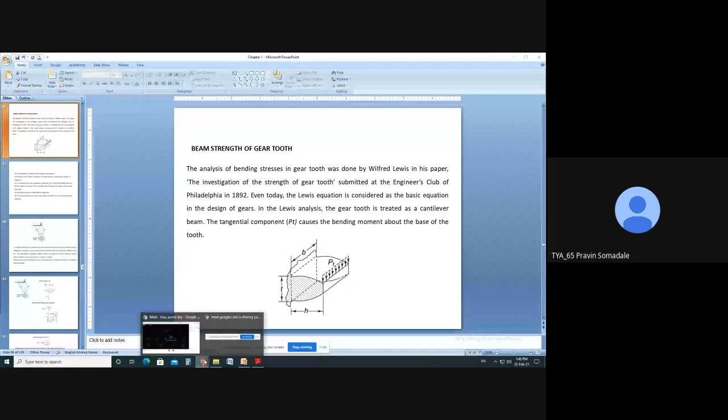Up till now, we have covered all the basic things related to gear. Now today, we will see the expression for beam strength of gear tooth.

Therefore, you are knowing that whatever spur gear teeth are there, they can be considered as a cantilever beam with one end fixed and the other end free, and the tangential load is uniformly distributed along the entire face width.

Therefore, in the diagram, it has been shown that width at the base is equal to B. T is equal to thickness of the tooth and H is equal to height of the tooth. And this PT is the tangential load which is uniformly distributed along the entire face width.

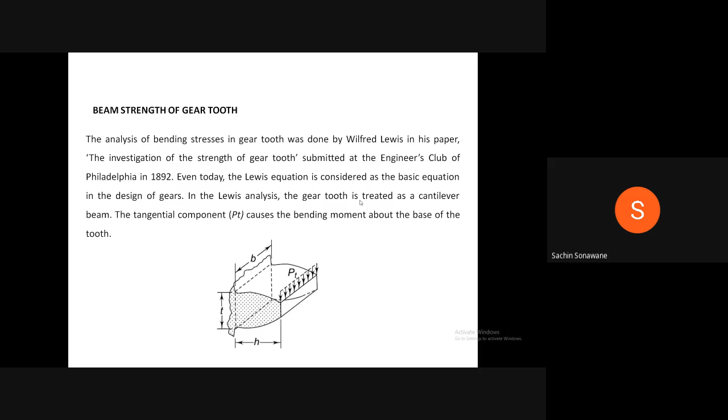Next, the Lewis equation is based on the following assumptions. The effect of the radial component PR, which induces compressive stresses, is neglected. Second, it is assumed that the tangential component PT is uniformly distributed over the face width of the gear. This is possible when the gears are rigid and accurately machined.

The effect of stress concentration is neglected. It is assumed that at any time only one pair of teeth is in contact and takes the total load. Therefore, write down these assumptions in your notebook. We will wait for 5 minutes. Hello, I think you have written this.

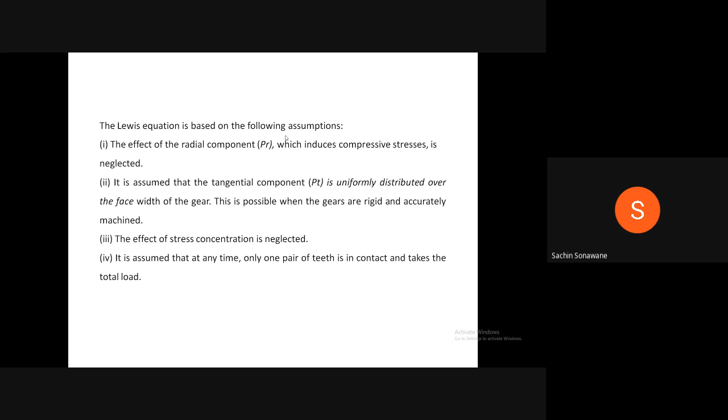Now next, it is observed that the cross section of the tooth varies from the free end to the fixed end. Therefore, a parabola is constructed within the tooth profile and shown by a dotted line in the figure. The advantage of the parabolic outline is that it is a beam of uniform strength. For this beam, the stress at any cross section is uniform or same.

The weakest section of the gear tooth is at the section XX, where the parabola is tangent to the tooth profile. Whatever has been written here is expressed in the figure. This is our original gear tooth. Now, in this gear tooth, we have constructed a parabola which is tangential at the base of the tooth.

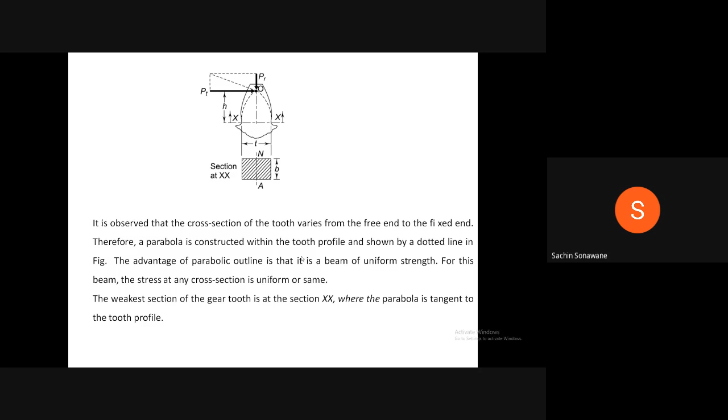Hello. I think you have written this. Now next, again we have drawn the diagram here so that while writing the equations it will be more clear to you. At the section XX, bending moment MB is equal to PT into H. See that this is the section XX, where we have to take the moment. Moment is nothing but force into perpendicular distance. Force is PT and perpendicular distance is H. Therefore, MB is equal to PT into H.

Now, since the cross section at the section XX is rectangular, we have to find out its moment of inertia and distance of neutral axis from the base. Its moment of inertia I is equal to Bt cube by 12 and distance of neutral axis from the base y is equal to T by 2.

We know the bending equation sigma b upon y is equal to Mb upon I, where sigma b is known as bending stress. Therefore, sigma b is equal to Mb into y divided by I. We have to substitute the above values: Mb equals Pt into h, into t by 2, divided by Bt cube by 12. Therefore, write down this.

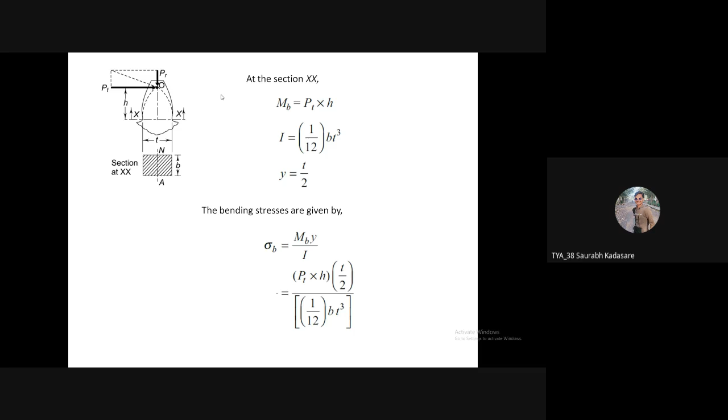Hello. I think you have written this.

Now, next step, rearranging the terms. We are getting Pt, or tangential load, is equal to b into sigma b into t square upon 6h. Now, multiplying the numerator and denominator of the right hand side by m, where m is equal to module. Therefore, Pt is equal to m b sigma b into t square upon 6hm.

Now, defining a factor Y. Therefore, Y is equal to t square upon 6hm. Therefore, tangential load Pt is equal to m b sigma b into Y. Therefore, in the above equation, Y is called the Lewis form factor, and the above equation gives the relationship between the tangential force Pt and the corresponding bending stress sigma b. Therefore, write down this.

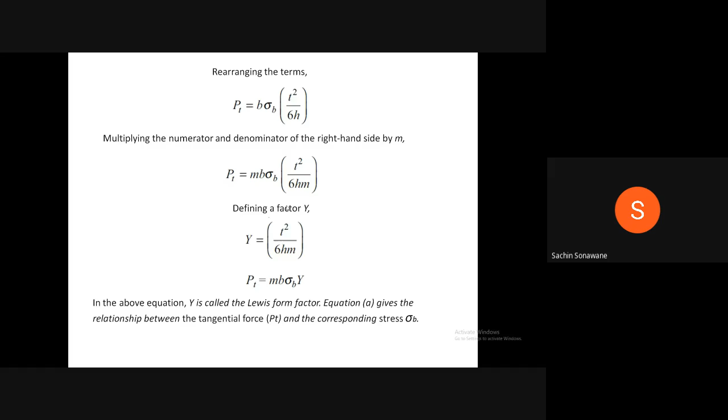Now next, when the tangential force is increased, the stress also increases. When the stress reaches the permissible magnitude of bending stresses, the corresponding force Pt is called the beam strength. Therefore, the beam strength Sb is the maximum value of the tangential force that the tooth can transmit without bending failure. Therefore, replacing Pt by Sb in the above equation, we get Sb is equal to,

Sb, beam strength, is equal to m b sigma b into Y, where Sb is the beam strength of gear in Newton, sigma b is the permissible bending stress in Newton per mm square, Y is the Lewis form factor, m is the module. The above equation is also known as the Lewis equation. Therefore, write down this.

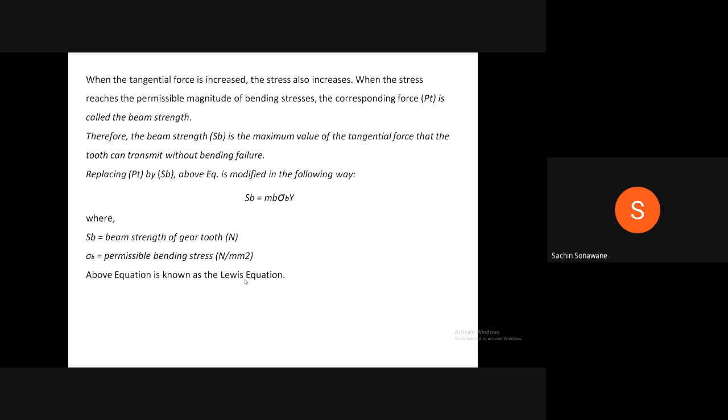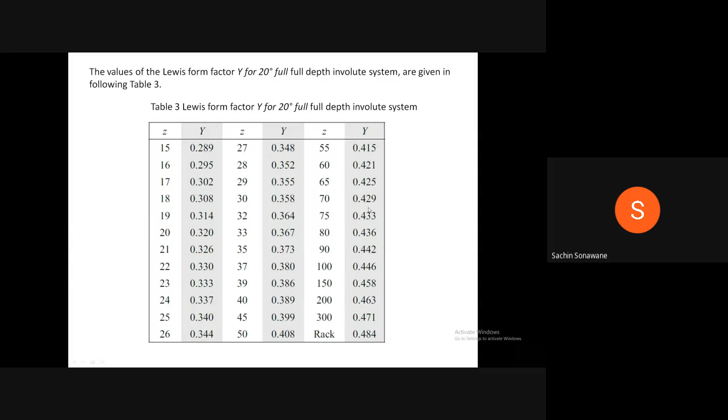Now, in order to avoid the breakage of gear tooth due to bending, the beam strength should be more than the effective load or effective force between the meshing teeth. Therefore, Sb should be greater than or equal to P effective. In the design of gears, it is required to decide the weaker between the pinion and gear. Therefore, rewriting the Lewis equation, Sb is equal to m b sigma b into Y. It is observed that m and b, that is module and face width, are same for pinion as well as

for gear. When different materials are used for pinion and gear, that is, for pinion cast iron is used and for gear steel material is used, therefore different metals are used for the construction of pinion and gear. At that time, we have to take into consideration the product of sigma b into Y, which decides the weaker between

pinion and gear. The Lewis form factor Y is always less for a pinion as compared to gear, because if you observe the table, Lewis form factor Y depends upon number of teeth. For pinion, always there are less number of teeth. Therefore, Lewis form factor is less for pinion as compared to gear. Therefore, when the same material is used for the pinion and gear, the pinion is always weaker than the gear. Therefore, while designing, this factor we have to take into consideration.